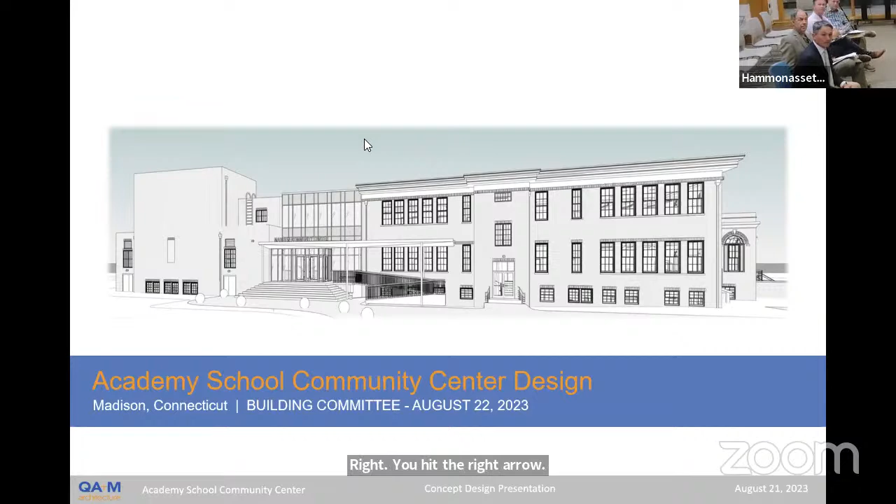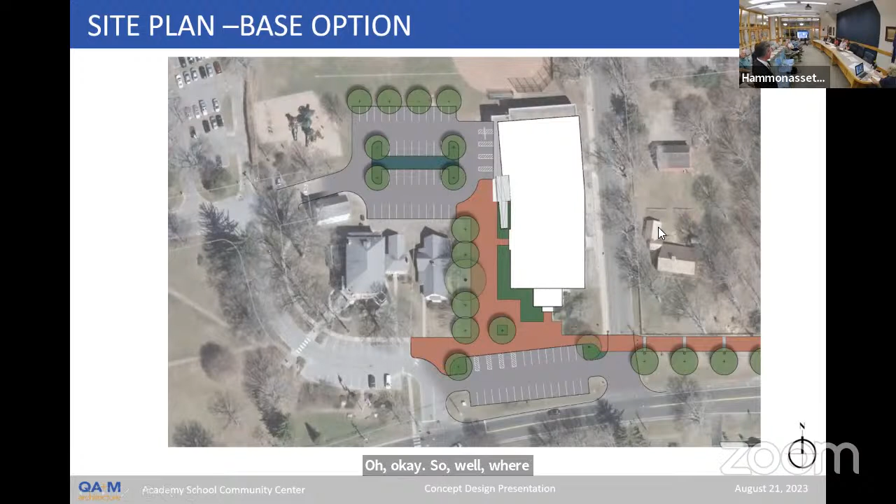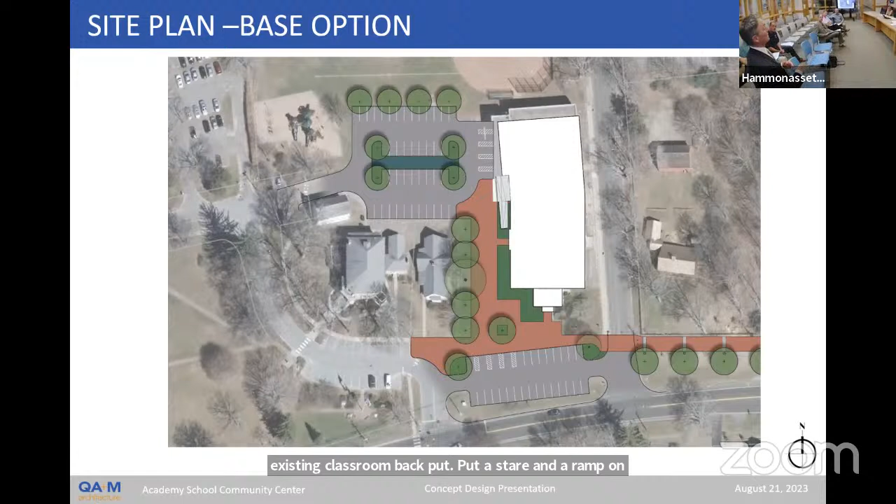Next slide. Right, can you hit the right arrow on the keyboard? Oh, it didn't go, oh no. There it is, oh look at that. Next one. Okay, so what we're proposing is, instead of gutting the total classroom bay, to reuse the existing classroom bay, put a stair and a ramp on the exterior of the building that gets you to the main level, and then put an elevator in the lobby. Great.

Maybe one more, perfect. This is a basement level. So this is the main level plan. The plan would propose not renovating, not enclosing the courtyard. We would build the elevator as a new elevator in the courtyard, but outside the building. We would leave the classroom construction entirely as it exists. The structure would stay, the 2-floor classrooms would stay, and we would create openings to get into that lobby space and create a vestibule on the exterior of the building.

We would build a whole new concrete stair and ramp, so that patrons approaching the building could come into this first level, which we would turn into the cafe space. So instead of having the cafe here, we would put it in the existing building, and the canopy would remain outside the building.

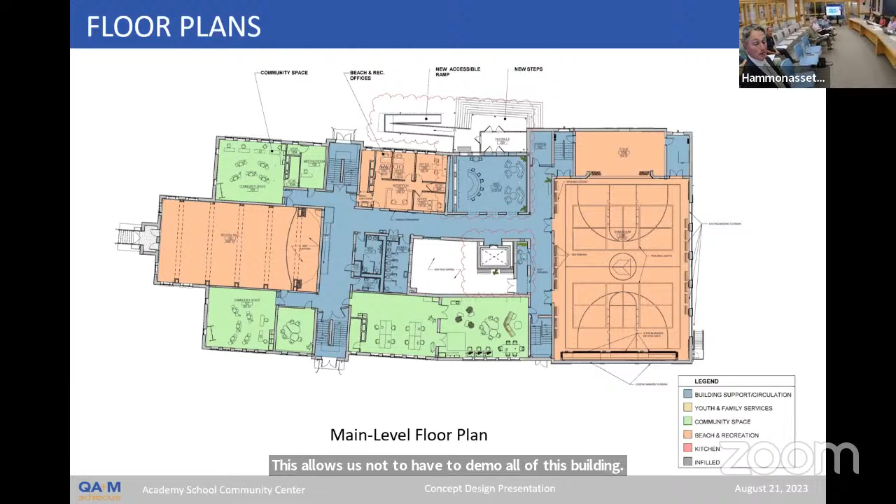The rest of the plan would remain entirely as it is. This allows us not to have to demo all of this building, and it allows us not to build the new steel framing and construction. It accomplishes some of the similar things.

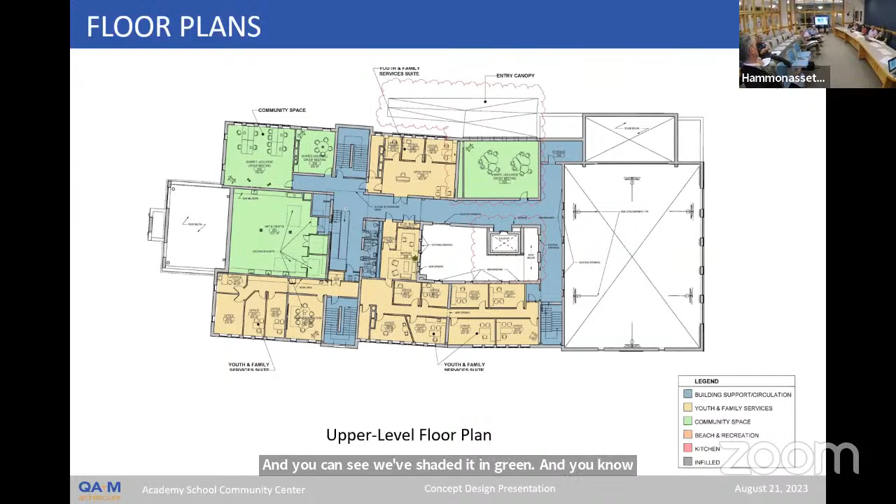On the second floor, this was originally taken out as it allowed to be a 2-story space. This would now just be renovated as another multi-function community space, and you can see we've shaded it in green. This too can be selected for value engineering, whether it's fit out or whether it's just left raw.

At the roof level, the courtyard would no longer be infilled, and these areas would just become re-roofed as existing re-roof.

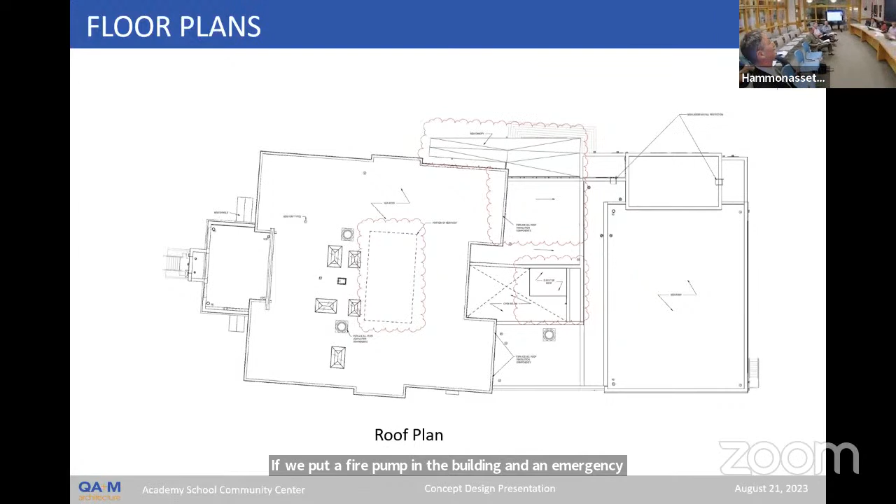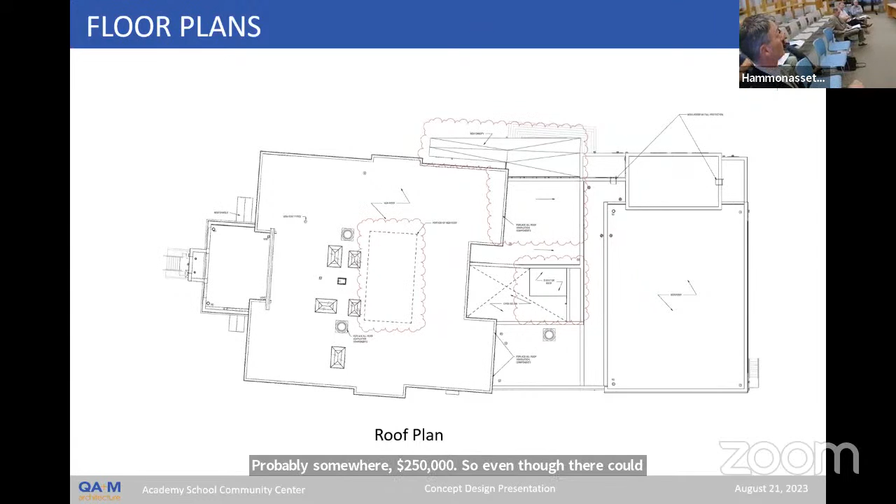Also, I'll point out that in our current scheme, we've considered removal of the penthouse for a couple reasons. One, there is the potential for a very small amount of savings if we remove it, I think we allocated $50,000. But two, if we have to sprinkler the building, this is considered a fourth story by current code. Because we're renovating enough of the building, we'd be required to bring it up to code, and we'd be required to put a fire pump in the building. If we have to put a fire pump in the building and an emergency generator in the building, those would represent significant cost increases to the project, probably somewhere to the tune of $250,000. So even though there could be potential costs to remove that, we're avoiding significant cost increases by removing it.

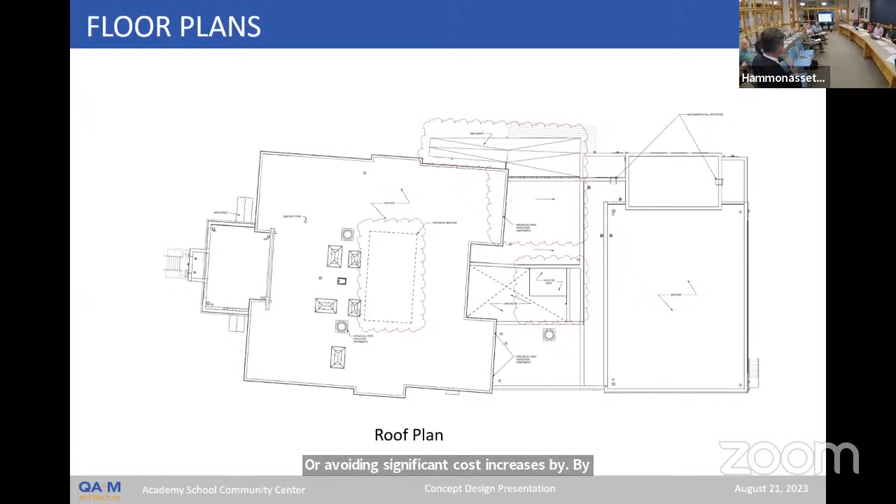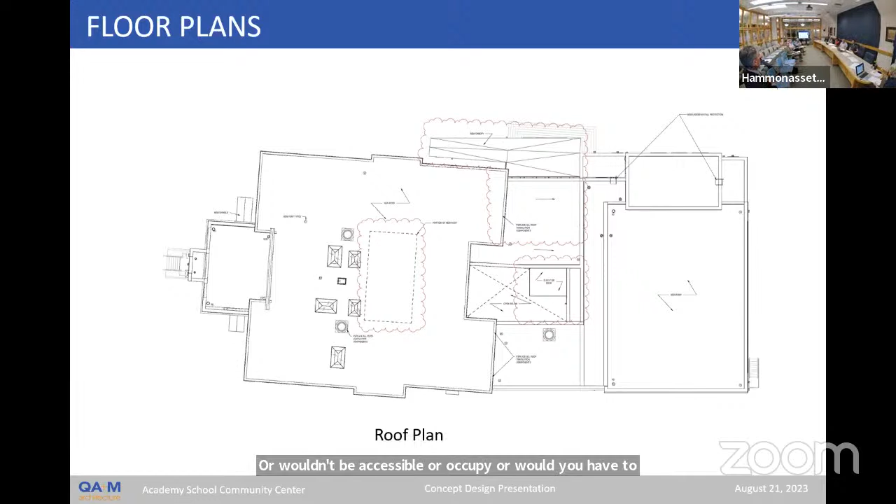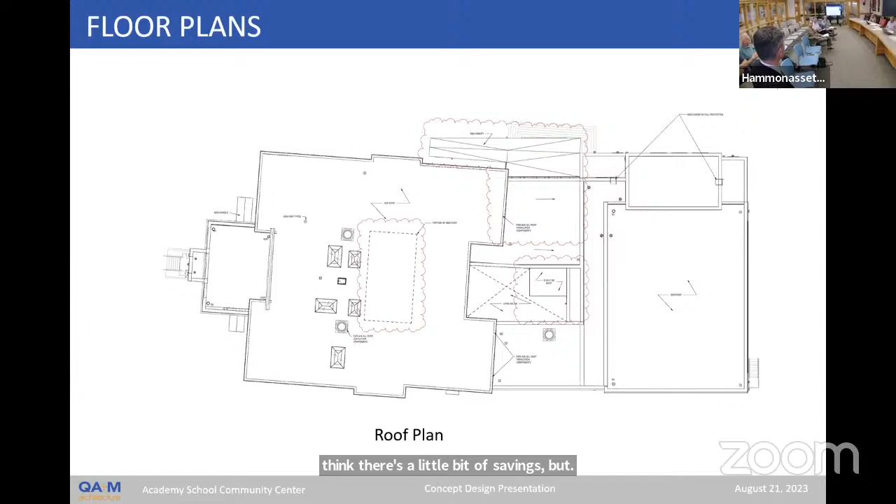Is it just a sprinkler component, or it wouldn't be accessible or occupiable, where you'd have to get stairs and elevators and other pieces to that space? Well, the penthouse wouldn't be accessible, but it could be used because there's equivalent spaces elsewhere in the building. Would you have to make it accessible? We would not have to make this space physically accessible because it's an existing space. In our cost evaluation, it costs about the same to just clean it up and put a new roof and windows on it than it does to actually tear it out, infill the roof framing and put a roof on it, so there's a little bit of savings. Would you still maintain access to the roof through that? Yeah, we could use the existing stairwell to get access to the roof in that area and just put a roof hatch over it.

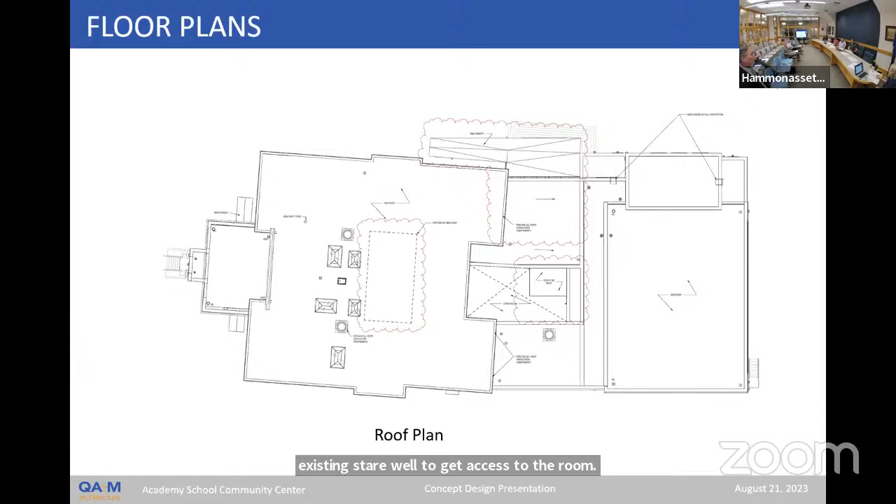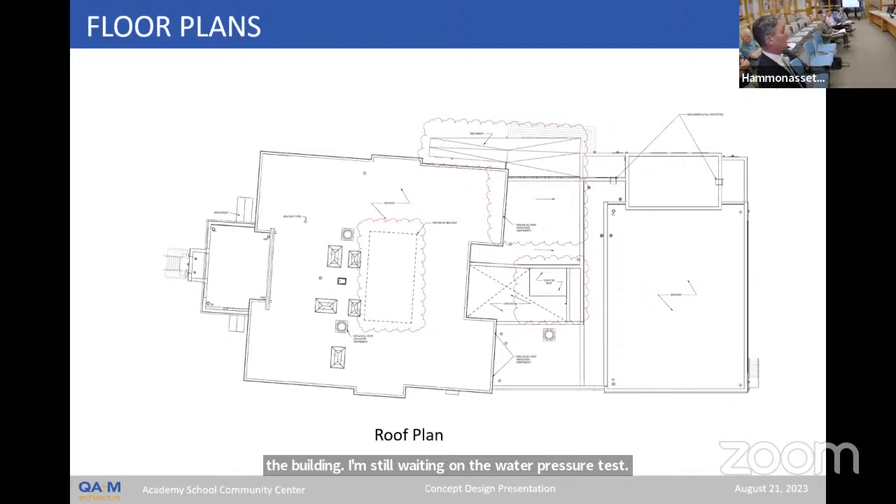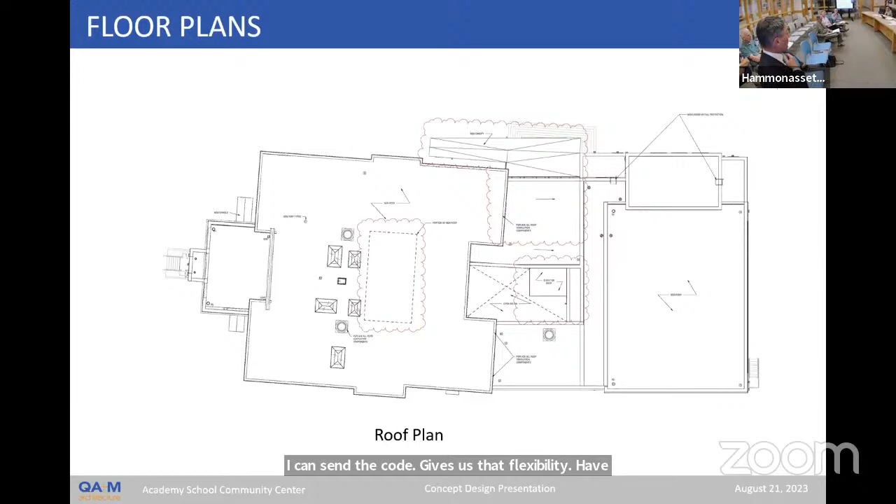So you said if we need to sprinkler, so when will we know? As of right now, we're presuming that we're sprinklering the building. I'm still waiting on the water pressure test, and we still have to have a conversation with the fire marshal. So we're presuming as if we have to do it. I contend the code gives us that flexibility, but I haven't discussed this matter with the fire marshal or the building official yet. Now, the budget that we saw last time included it. That's correct, yeah.

Is closing off the penthouse an option? Just sealing it off, is that a viable option? Well, I think cleaning it up and renovating it, or removing it, are the two options. What do you mean by removing it? Removing it, just taking it off the building, that's what we're kind of proposing. The whole thing? Yeah, and just provide a roof area. I think there's a number of benefits to it. I mean, it's a nice space, but it needs a lot of work, and it's not accessible. And again, if we're forced to provide a fire pump for the building and an emergency generator from a mandatory perspective, I think we're gonna incur a significant amount of cost and scope to the project. And is that because it's a fourth floor, Tom? That's correct. So 3 floors you don't need, but if there's a fourth floor, then those codes kick in. That's correct. Okay, yeah.

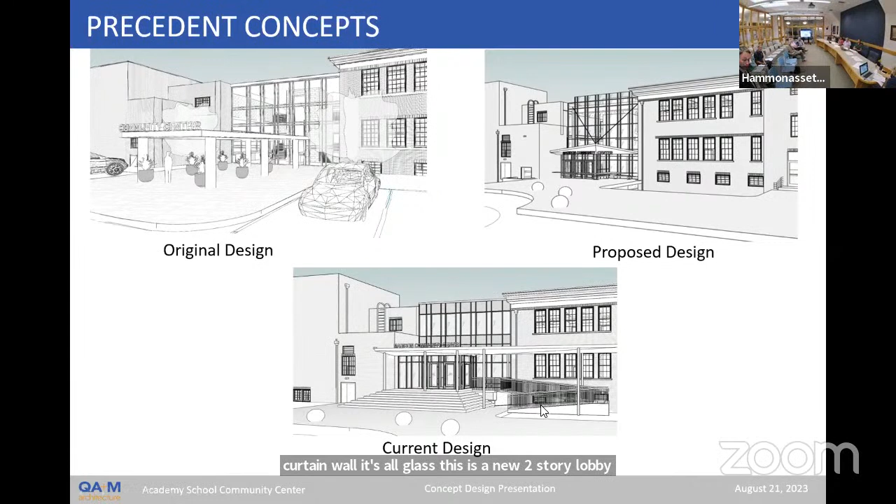So here are the original concept designs for the front entrance. This was done during the study phase. You can see we have this curtain wall, and you can visibly look into the lobby. This is where we were tearing that whole section of the building out with a straight canopy. This is a more recent design where, again, we have the curtain wall, it's all glass, this is a new 2-story lobby. This would be the revised concept where what we plan to do is cover the existing facade with storefront glass, which is less expensive than curtain wall glass.

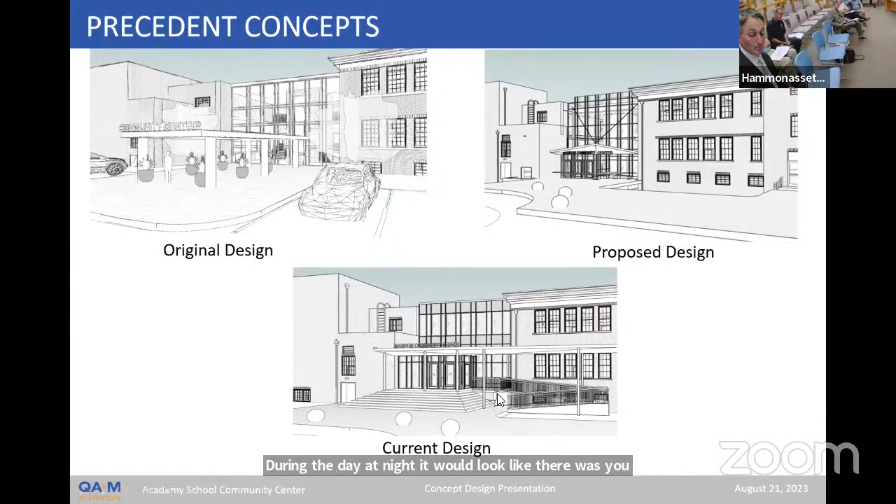We would line up the storefront to align with the existing window openings. Right now there are five window openings at each floor. So from the outside, it would still maintain the appearance of all glass during the day. At night, it would look like there were punched openings because the light would come through. But in the daytime, it would still have a similar appearance and it would seal that side of the building.

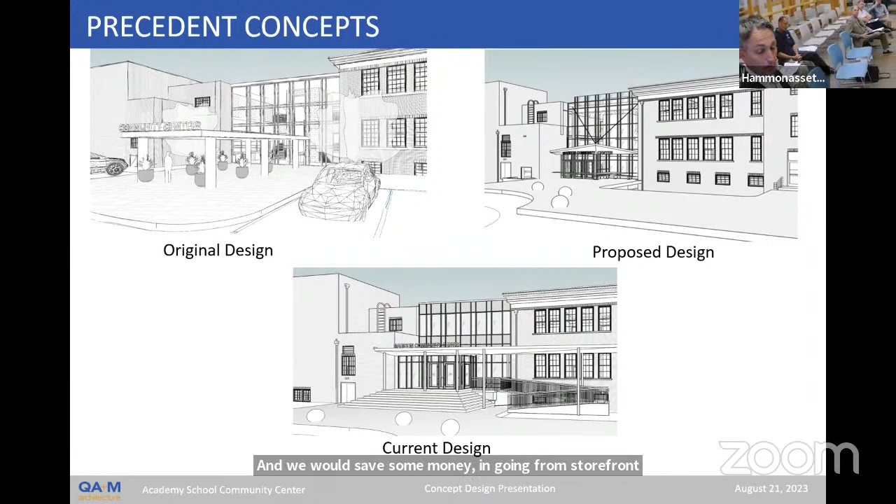You can see we have a proposed stair and ramp, and we've extended the canopy to cover the ramp area and a new vestibule. So it has a similar appearance to our original scheme. We would save some money going from curtain wall to storefront, but most of the savings are in leaving the existing structure. Next slide.

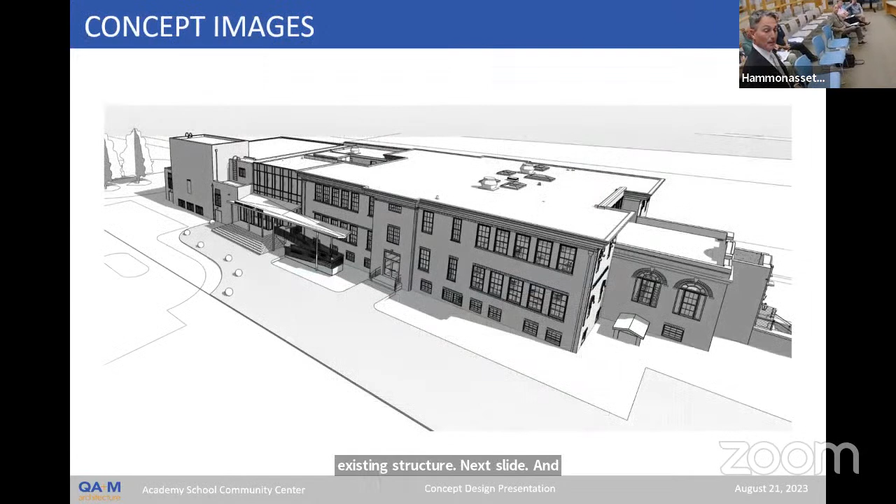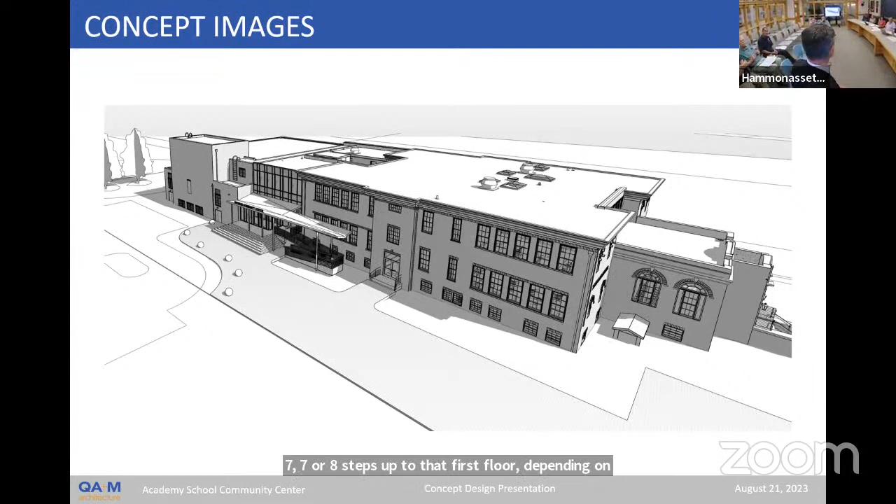From a 3D perspective, this is how it would look. Access to the building would remain the same. It's about seven or eight steps up to that first floor, depending on what the final exterior grade is. Maybe that can come up a little bit, and we lose a step, and then there would be a ramp to the outside. You can see this is what it looks like with the penthouse removed, and you can see the elevator is kind of peeking above the roof there.

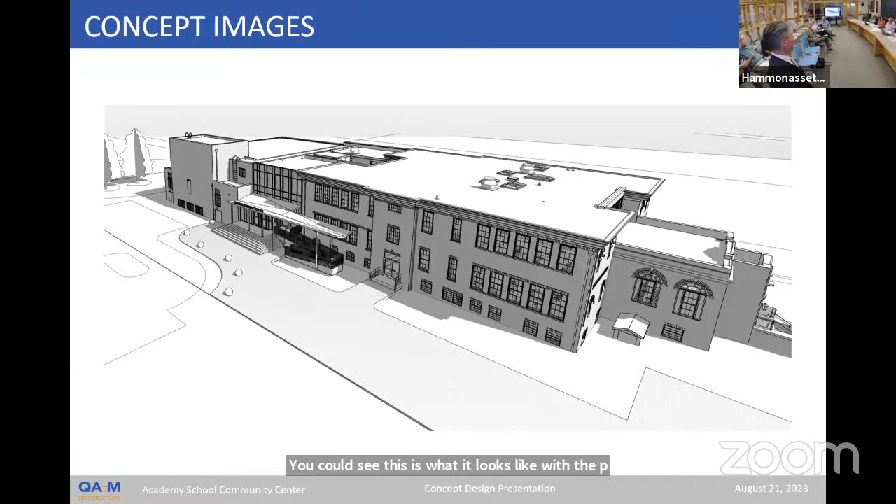Hey, next slide. Tom, yep.

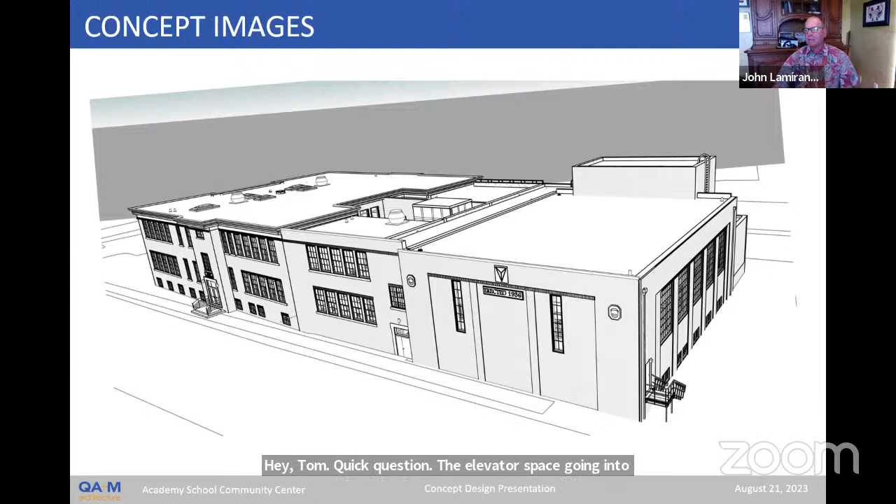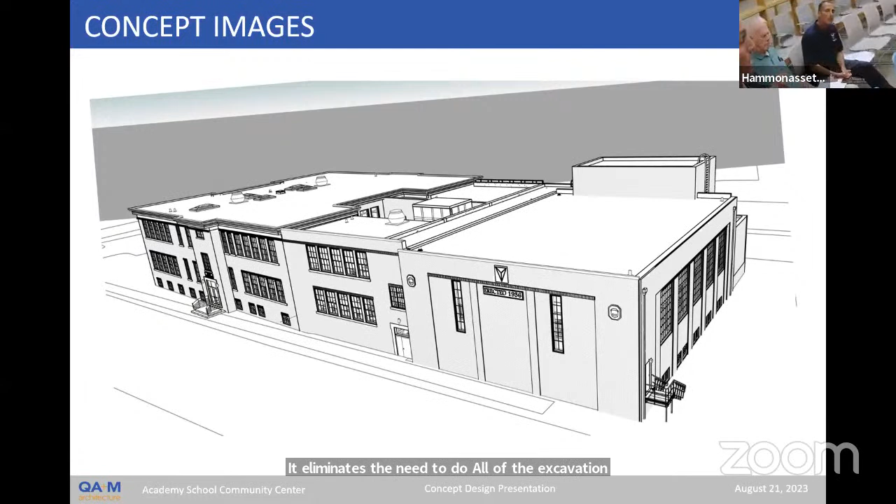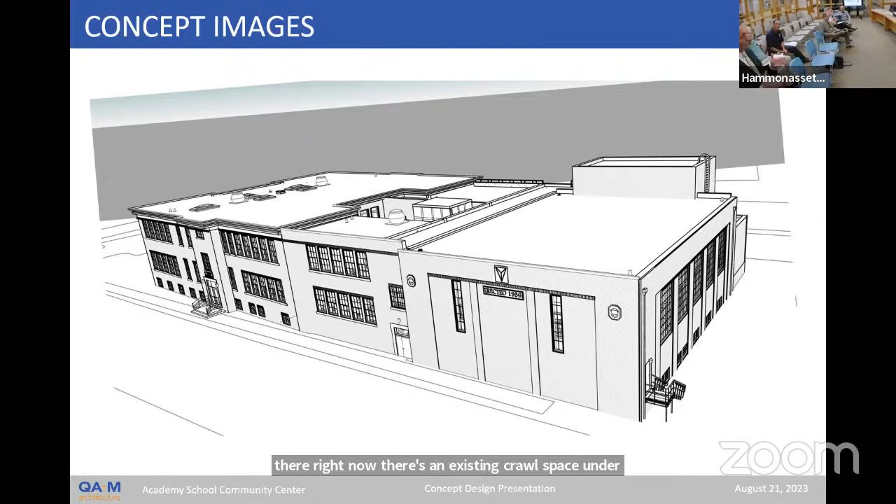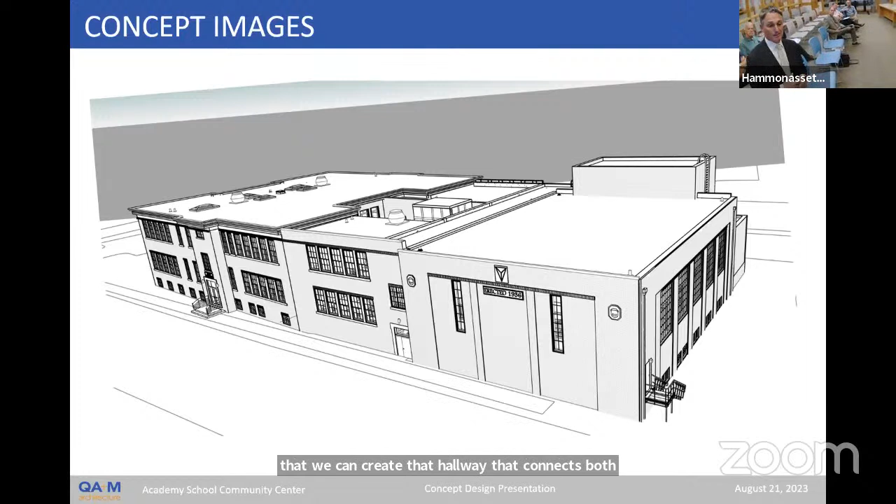Quick question: the elevator space going into that center courtyard area, does that eliminate the need to excavate when you have the steps up to that first floor? It eliminates the need to do all of the excavation except for the hallway that we're going to break through. Right now there's an existing crawl space under that entrance classroom, and we're going to have to underpin the foundations so that we can create that hallway that connects both sides of the basement. I really think that's essential. There's some cost to do that, but yes, we've eliminated all of that excavation work.

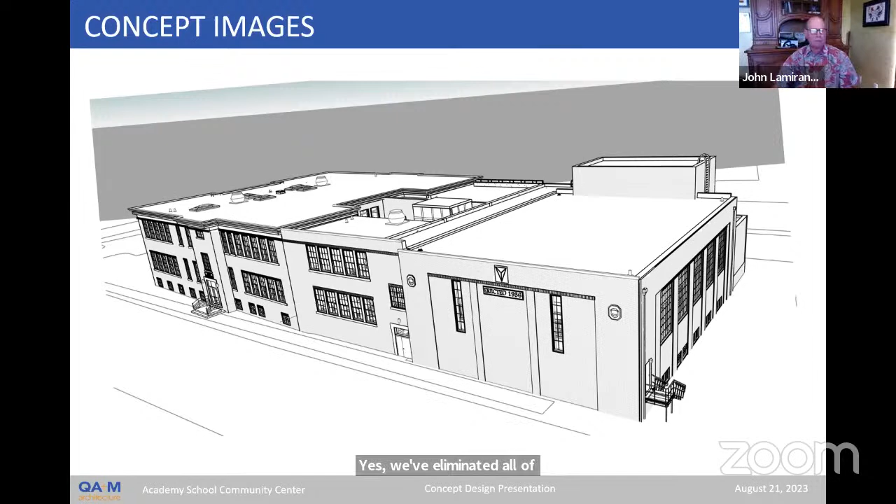Great, thank you. And then maybe there's one more slide. This is what the exterior of the building would look like head on.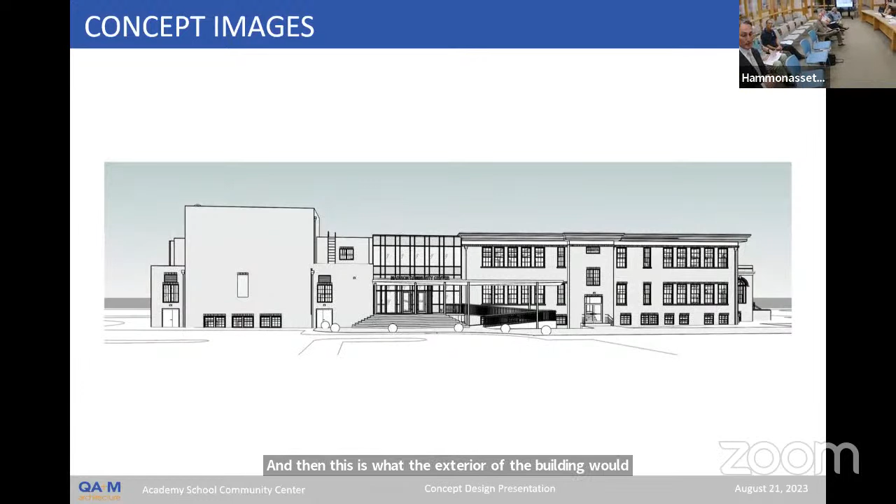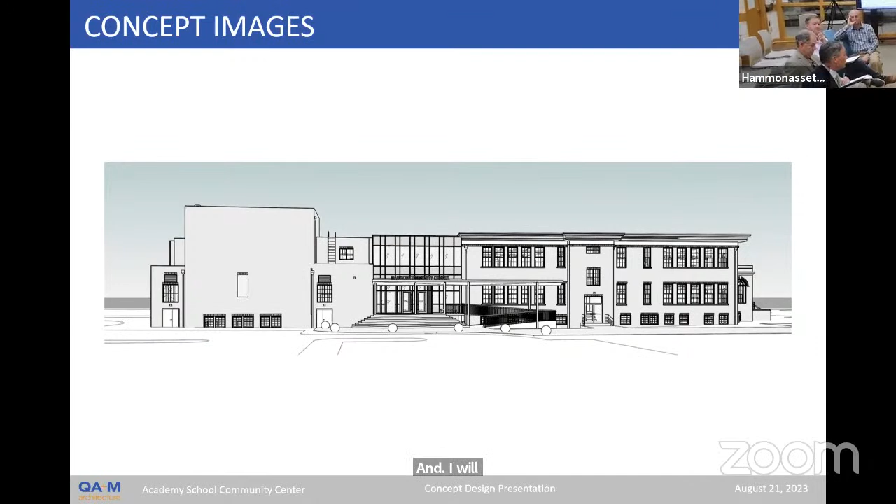I did hear back from the cost estimator today, much to my dismay. He projected the savings at no more than $350,000, and I was taken aback by that a little bit. I thought we would discover maybe $500,000 at best.

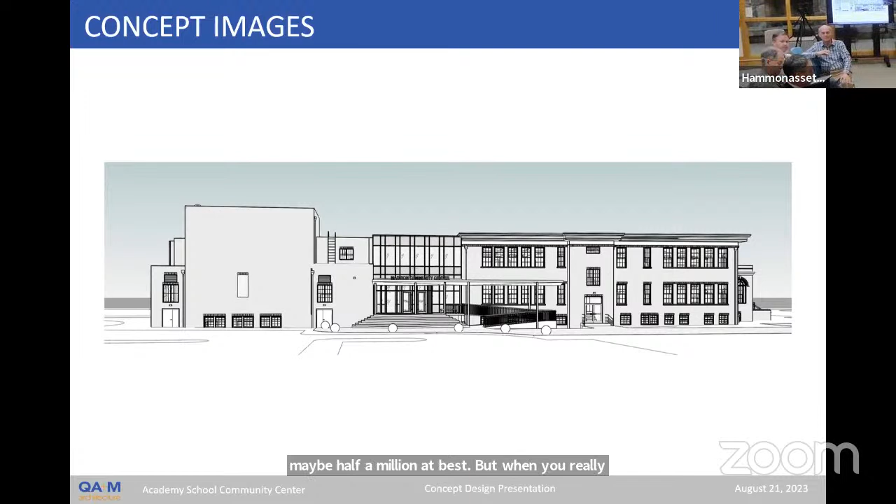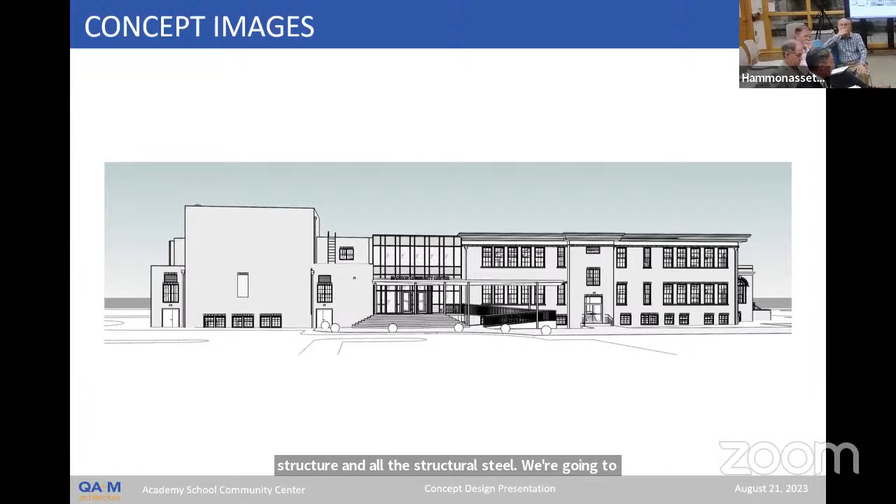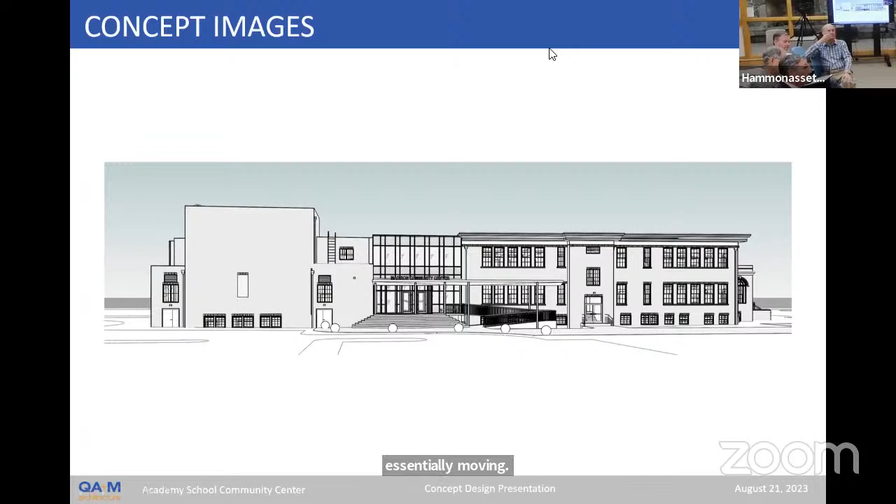But when you really start looking at it, we had a really good discussion. We removed the structure and all the structural steel. We're going to remove a chunk of demolition work, which is good, but we really can't remove the elevator - we're just essentially moving it. And we're removing the infill of the floor and the courtyard, removing the fit out of that space.

But we're adding back in the stairs, the concrete stairs at the exterior, which are pretty significant, the stairs and ramp. We're adding in a bigger exterior canopy. We still have some exterior glazing treatment at the outside of the building, and now we have to fit out the front classroom and the classroom above it, so we're adding back in fit out costs of those spaces. The cost of the roof is saved, and we've already taken the savings to remove the clerestory light in another line item, so we can't double dip those savings.

The one thing I argued with the estimator about is that we're not factoring in any savings associated with simplifying the construction - meaning it's more complicated to demo the building and build new in that little area than to just renovate the interior. The estimator at this point just doesn't have enough information to make a bigger bite out of the number, so I've benchmarked it at $350,000. I will reflect that in the value engineering savings. I think it's enough money to really think about.

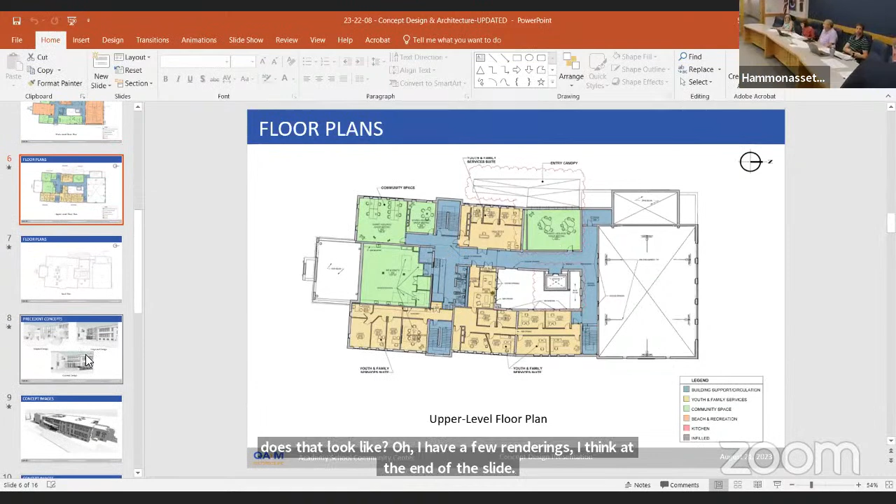So this is the main level. What does that space look like - what had been the interior of the building that's unfinished? Oh, the courtyard? What does that look like in this - what does it look like today? I have a few renderings at the end of the slide. On the inside, there's an elevator. Oh, it's an elevator, okay.

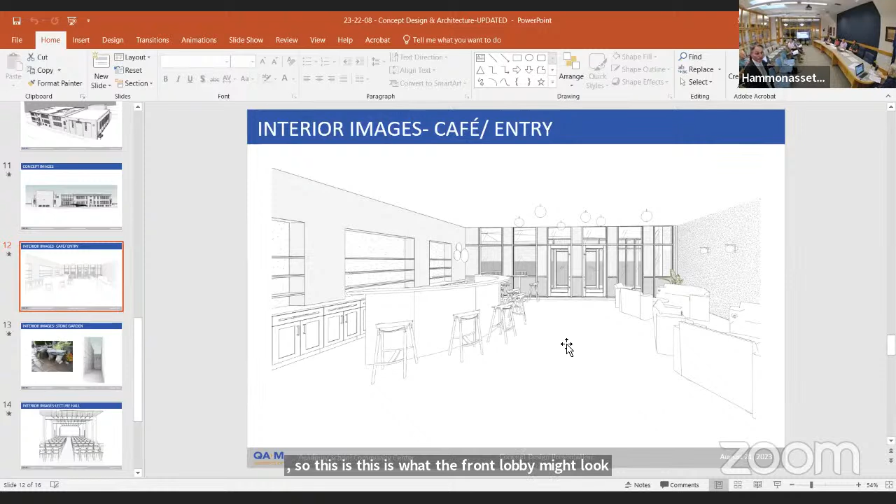So this is what the front lobby might look like. We would turn that front classroom into the cafe, some soft seating, and you would walk through that space when you came and went.

So our thought was we would turn that courtyard space into just a rock garden, something low maintenance. It could be ornamental grasses, or something landscaped in a simple way, so you could access it through an interior stair, or we'd create a door so you can get in there and maintain it. It's not an awesome space, but maybe that's an opportunity for artwork.

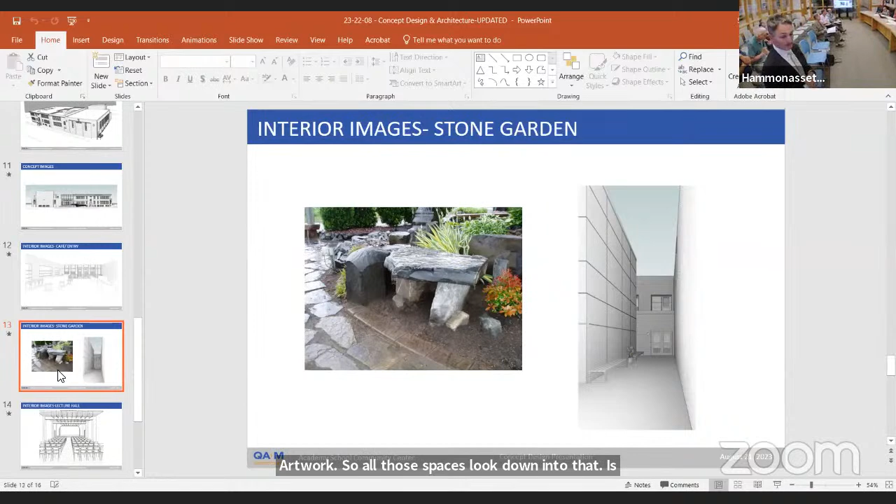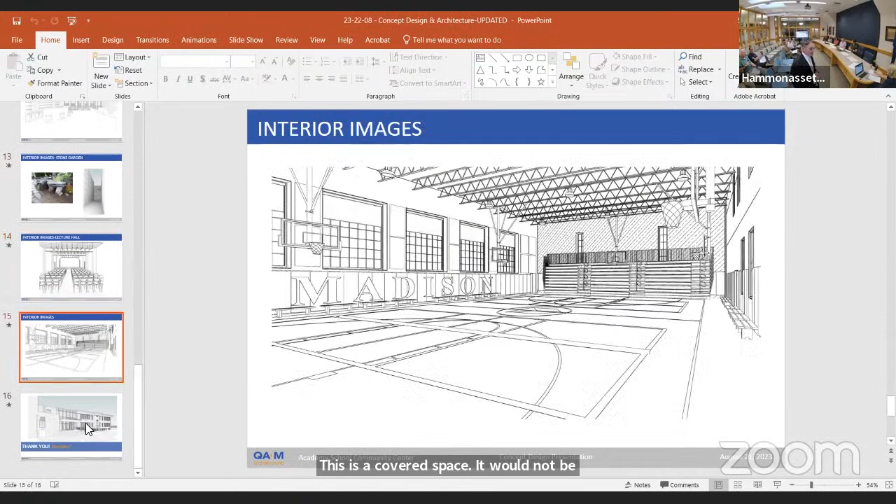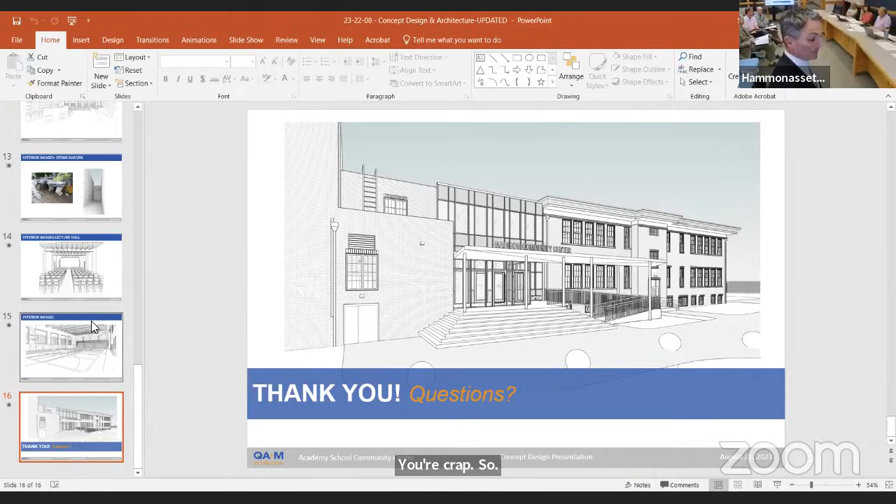There's an assumption about drainage. We could just leave it unfinished, you're correct, that's fair. So there's drainage—maybe go back to the title, the very first page. With this, yeah, the sewers, the septic, the leach field is underneath there, and that's going to be dug up. Some version of that's going to be changed, decommissioned.

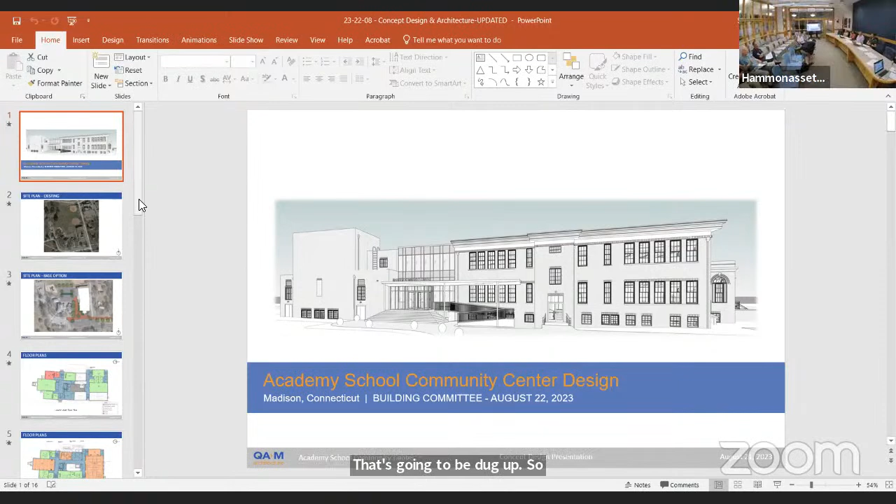Can we just look at the lowest level slide, since we went by it quickly? Oh, the basement side, yeah. So this is what I was talking about. Currently, this entire rectangle is crawl space. There's a way to get into it, but it's a really high access hatch, and there's no way to get from this side of the basement to that side—you have to go up the stairs, walk over, and go down the stairs.

We would propose underpinning the foundation on this exterior wall of the courtyard so we could make that corridor go through, and then the elevator would connect that corridor, giving you elevator access to both sides of the building. Again, it's a functional solution, and I think it should be considered by the committee.

As we mentioned at the prior value engineering meetings, we are over budget, but we're at a very early stage—this is very schematic in nature. I don't have a construction manager on board to help with estimating, or another independent estimator to do that. The drawings are schematic, and the MEP documentation is narrative in nature. To really fine tune the costs, I believe we need to go through the design development phase.

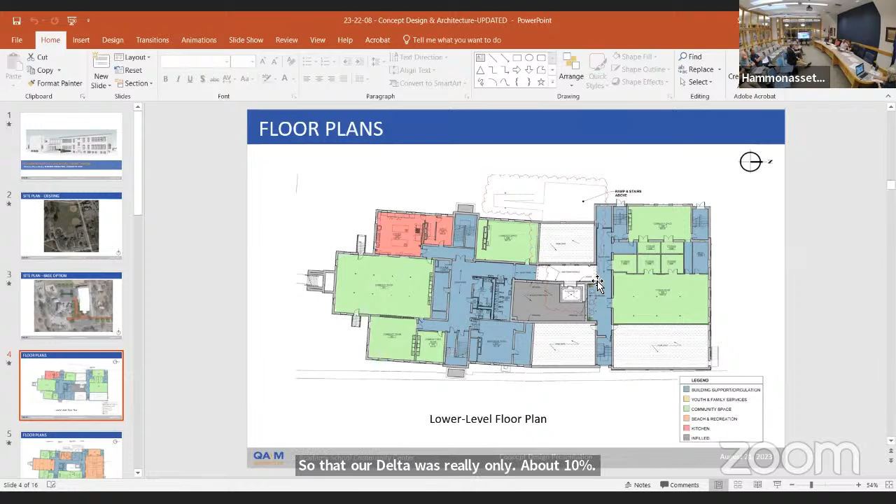However, I did indicate that I felt we really needed to close the gap. I think we had a gap of about 2.5, and I felt we needed to find about $1.5 million so that our delta was only about 10% before moving to the DD phase. So I still contend we need to be in that range before we go to the DD phase, and I think we need to continue looking for cost savings measures.

And I think this is one that should at least be considered: if we turn space into storage, do we have to keep that space? You have to temper it, yeah—to protect the building you need to keep it at 50 to 55 degrees in the wintertime, and under 85 or so in summertime. So it has to be tempered.

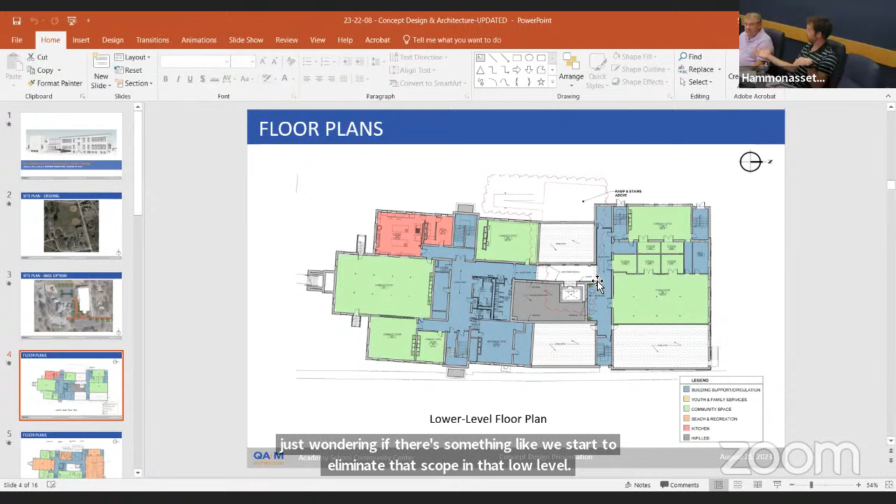I'm just wondering, if we start to cut scope in that lower level, is there an ability for us to say we don't need that square footage necessarily? We take some of those areas that are probably partially underground and will maintain pretty well already, and cut some of the MEP cost out of our budget if we say that's not livable or usable space. That's good information—yes, I think we could do that, we could really pare back MEP scope in some areas.

But I think in order to get a value of that, we'd really have to get into the weeds and have the MEP engineer lay out a design for those areas that's scope is really pared down. If it's a storage room, it just has utility lighting and maybe service outlets, and that's it, with supplemental air to temper the space. We could potentially do that. That space was always humid.

It had a moisture problem, this school. If we tempered the MEP, would that also cut back on the HVAC? I think you'll need to do something in that space to keep the humidity down, because it was an awful place in the summer. Yes, you'd have to do something, some sort of dehumidification. Maybe you don't have to provide air conditioning at that level—well, dehumidification is air conditioning, but maybe there's a different approach.

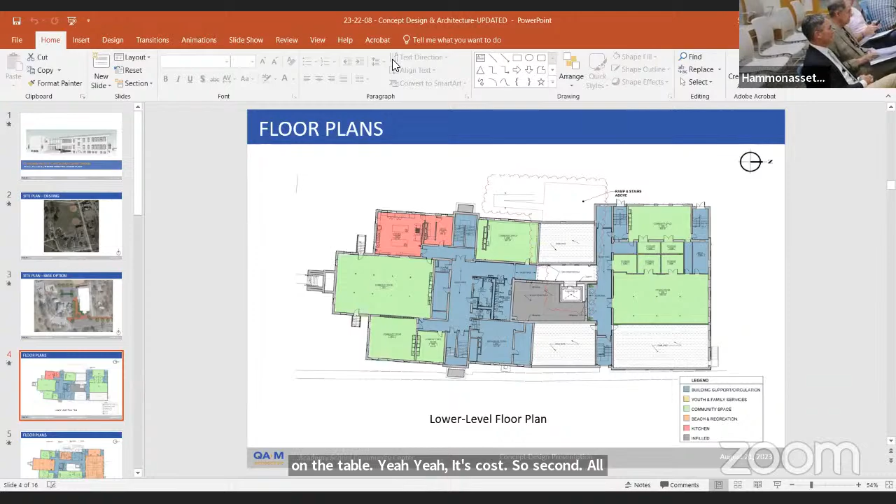So the second question, all of these dollars are in 2023 dollars. That's correct, our budget is 2021. Yes, but our actual construction is going to be 2024 and 2025. The budget does have escalation included in several lines. But does the estimate include escalation? The estimate itself does not include escalation, but it does include design contingency. It's just our cost in today's dollars, and the owner's budget includes escalation.

Just a quick input, if I may. Go ahead. I can only hear about three-quarters of what's being said, so if it's not the appropriate time, let me know. But we've got a 54,000 square foot building, and we have to keep in mind that only 25,000 of it is programmable space.

Do we know what percentage of that programmable space is on that bottom floor? It's a good chunk of the top floor that's already allocated to other purposes where it's not programmable space. So we need to be careful not to cut ourselves back to a point where we don't have sufficient space for generating income for operating expenses and satisfying the needs of the community. I know it sounds like a lot of space, but when you look at the programmable space, which is what the community center is all about, it's more limited.